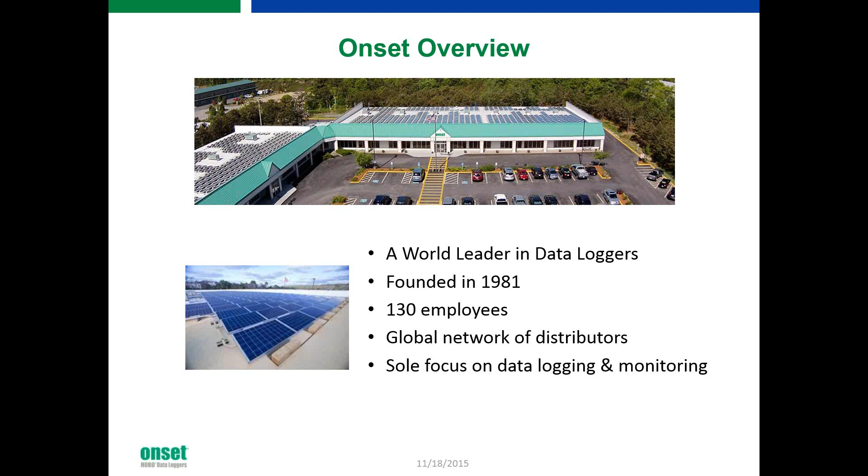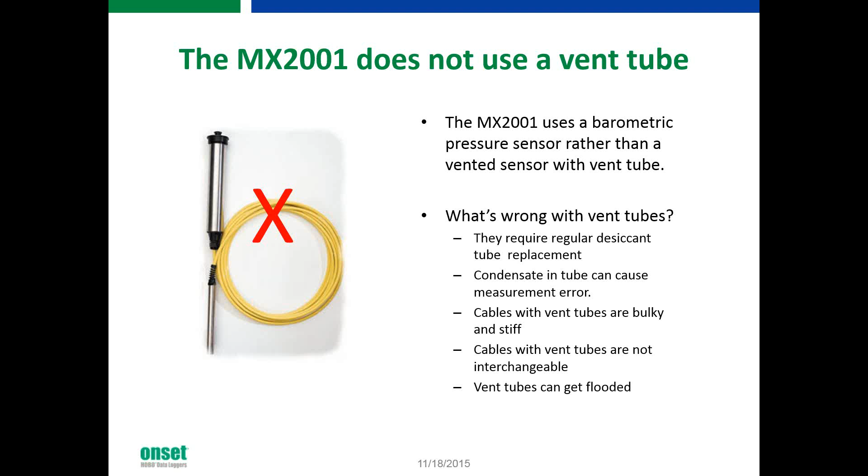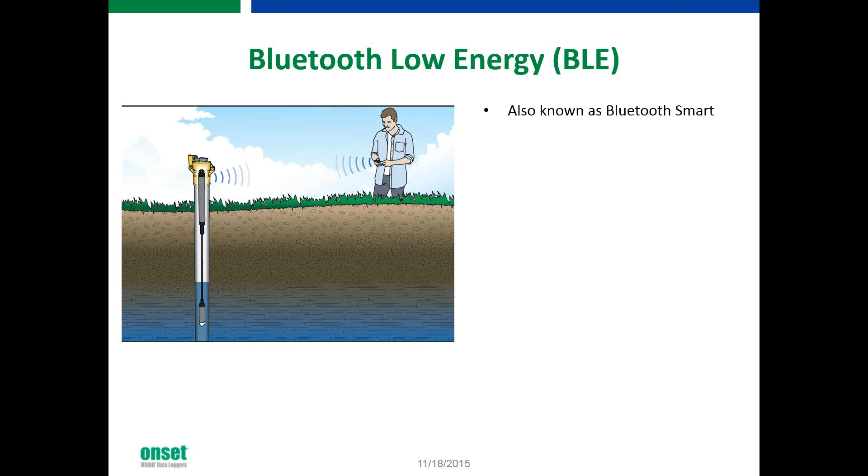Also I want to point out that this logger uses Bluetooth Low Energy, also known as BLE, which is also known as Bluetooth Smart. There are different terms used by different organizations. We tend to use BLE. The nice thing about BLE is that the mobile device can initiate communications without needing to push a button on the logger, which would be necessary if we had used classic Bluetooth 2.0. So BLE really provides the easiest offload.

It also provides low current use, which enables the 1-year battery life that we get from the AA batteries in the top unit. Today's mobile devices come with Bluetooth 4.0, which actually includes both BLE that we use as well as support for classic Bluetooth.

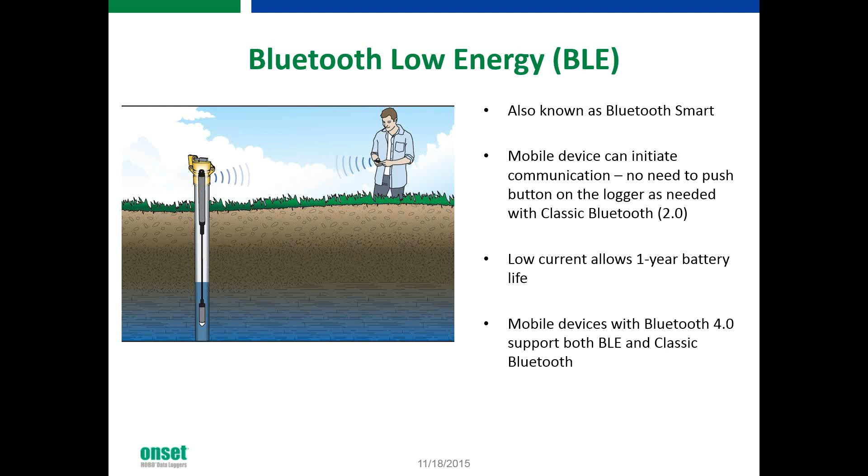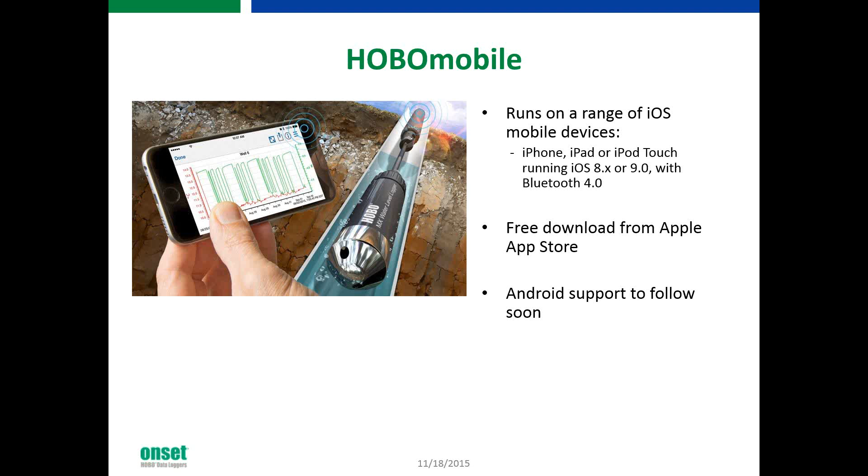Now switching gears from the hardware to the software side, HOBOmobile is the software interface. It runs on a range of iOS mobile devices, including iPhones, iPads, and iPod touches, running iOS 8.x and 9.0 that have Bluetooth 4.0. This is a free download from the Apple App Store. You can go there and take a peek at that now. At this point, we do not have Android support yet. That's in progress, and we hope to have that soon.

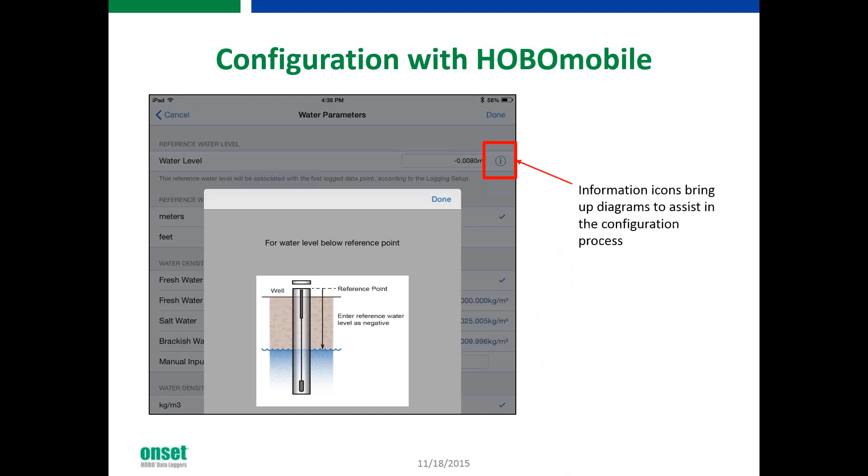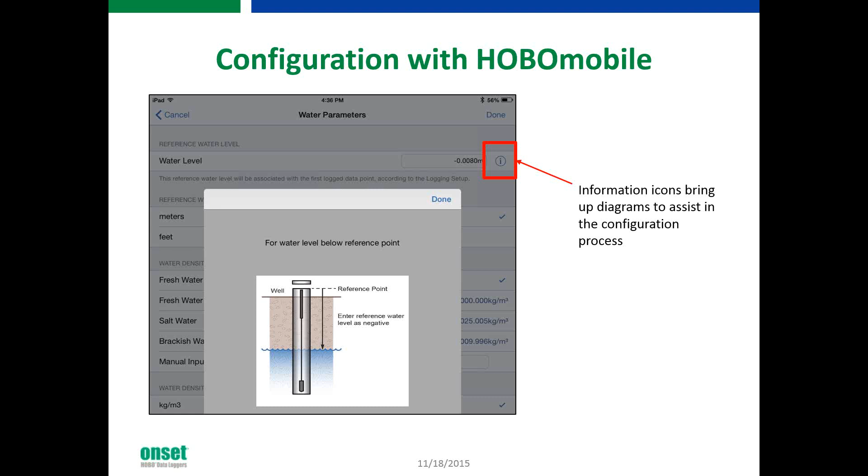So also in configuration, we've got these little handy diagrams to help you decide what polarity to use when entering the reference water level. So for example, if you're using the top of the well as your reference point and you're measuring down to the water table, you'd enter the reference water level as a negative value. That keeps the polarity correct. And those little screens are accessed with that i icon up there.

There's several logging modes in this logger. The first one is kind of the traditional, normal, fixed-rate logging, where it logs every 5 minutes, for example. Then we have the option of multi-rate logging, where you can define in advance up to 8 logging intervals. Each logging interval can have its own logging rate and number of samples. So an example of where you might want to use this is in a pump down test, where you want to sample very fast at first, but then you want to slow down the logging rate as the aquifer reaches equilibrium.

There's also a burst logging mode. Some people call this an event logging mode. And basically what this is, is that a logger will log at a faster rate when the water level goes below or above some reference level that you can enter in. So, for example, when the pumps turn on and it draws the water level below a certain level, you can have it log at a faster rate for that time.

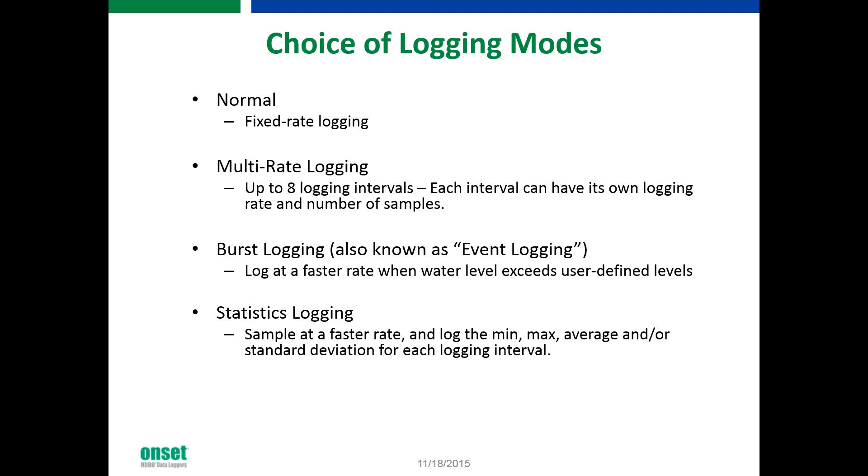Another mode in this logger is statistics logging. This is where it takes samples at a faster rate and then can log the minimum, maximum, average, and/or standard deviation for each logging interval. So for example, you might sample at a 30-second rate and log every 5 minutes, so you get the average of 10 readings over that 5-minute interval. That can be useful if you're trying to look for peaks and/or averaging out noise, for example. You know, averaging out waves. The statistics can help with that.

So as I mentioned earlier, you can view the current conditions during the deployment. So here's the 4 readings you can see in real time: the differential pressure, the absolute pressure, that's the absolute pressure of the sensor that's in the water, the temperature of the water, and then the water level can be displayed directly there as well. So you can view those during the deployment at any time when you're out in the field.

And then you can also view the product ID, device details like battery level, make sure your battery level is still good, make sure you've got enough memory left, and confirm that it's logging.

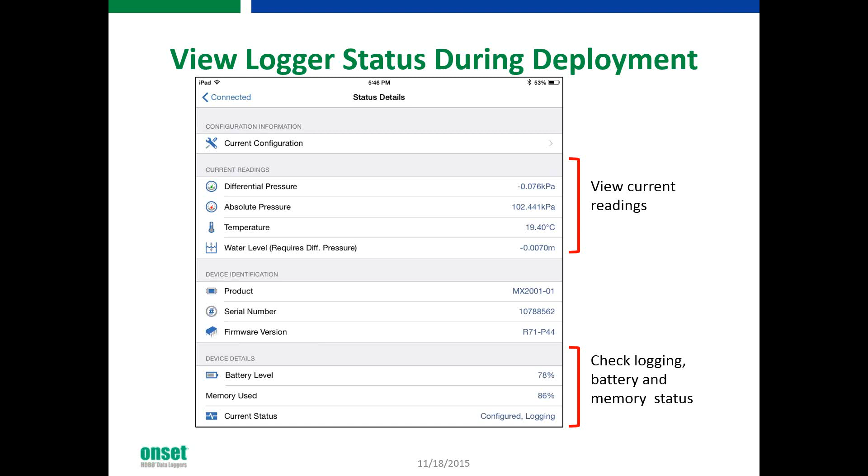And turns out these mobile platforms are pretty powerful, so we can easily show graphs, and that's a nice way to confirm that everything's operating as you'd expect during the deployment. So you can offload a graph like this, and then you can use the pinch and outward spread gestures to zoom in and zoom out to get a better view of what's happening.

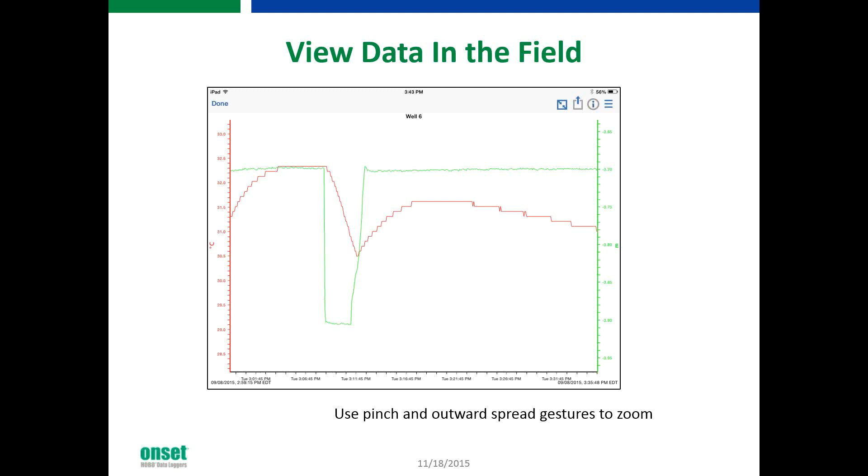And then you can easily share those offloaded data files in a variety of formats: Excel, CSV, text formats, our HOBO format for compatibility with our HOBOware software. And then you can share these via email, AirDrop, Google Drive, etc. And that depends upon what sharing apps you have installed on your device.

We also have a time-saving option, which allows you to carry over the logging configuration settings for a group of loggers that are being deployed together so that they all start at the same time and all have the same logging rate. It's a good way to ensure consistency across all your loggers.

However, this does not carry over the reference water level or water density or alarm settings for the loggers. It keeps whatever was in the logger already. We're assuming that the loggers are staying in the same well, so you want to keep the same reference level in the logger.

So a few other specifications that might be of interest. The first one I want to talk about is accuracy. When you're thinking of accuracy, you need to consider both the water level sensor accuracy and the barometric pressure sensor accuracy, because they can both contribute to measurement error.

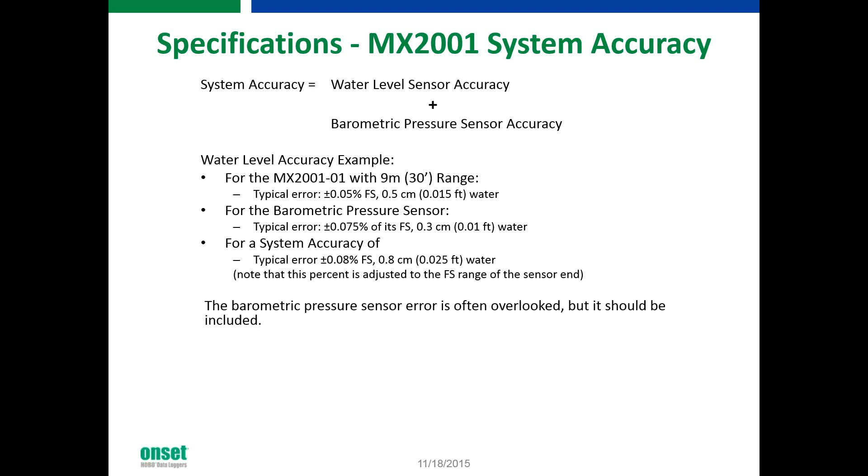And if you convert that over to percentage, that's 0.08% of full scale. So that just gives you a sense for how to determine the accuracy you're going to get. And being quite honest, barometric pressure sensor error is often overlooked when people are looking at water level loggers, but it really should be included as part of the overall system accuracy.

And the MX2001 sensors are calibrated in production here to provide accurate temperature compensation over the 0 to 40 C operating range, or actually I should say calibrated range of these loggers.

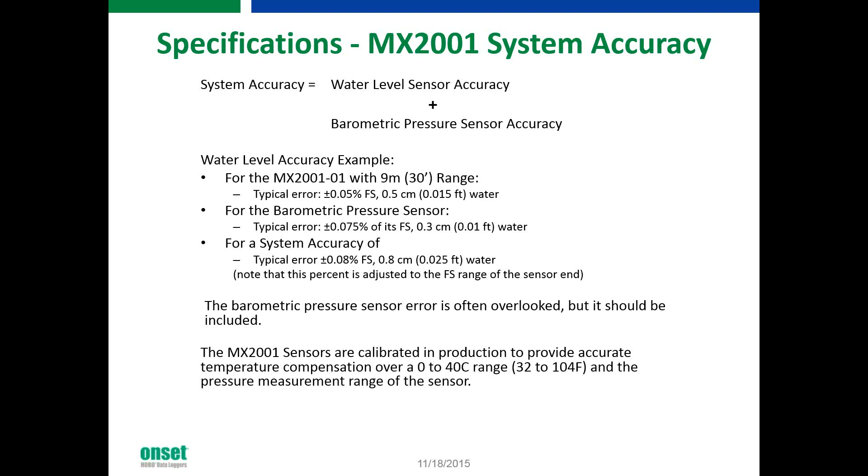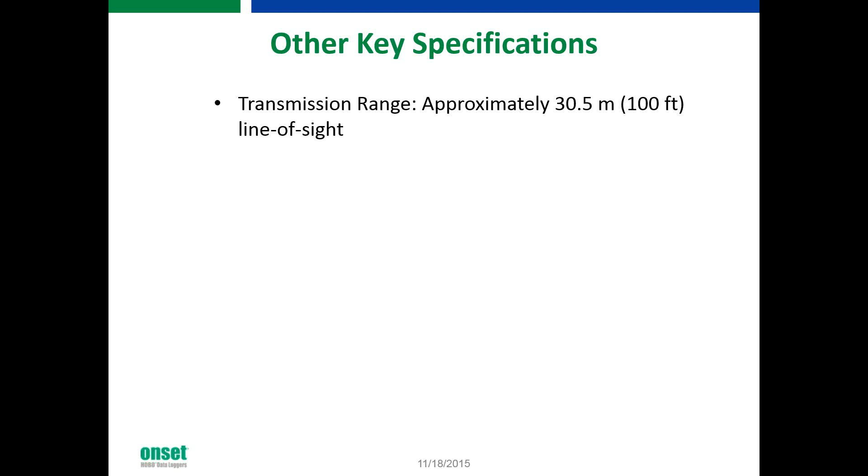Some other specs you may be interested in. The wireless range is 100 feet, or just over 30 meters line of sight. So if you're in the area, you're going to be able to read out the logger. Memory is 256 kbyte. That's good for 30,000 sets of measurements of all those different parameters that the logger records: the temperature, differential pressure, absolute pressure, water level, etc.

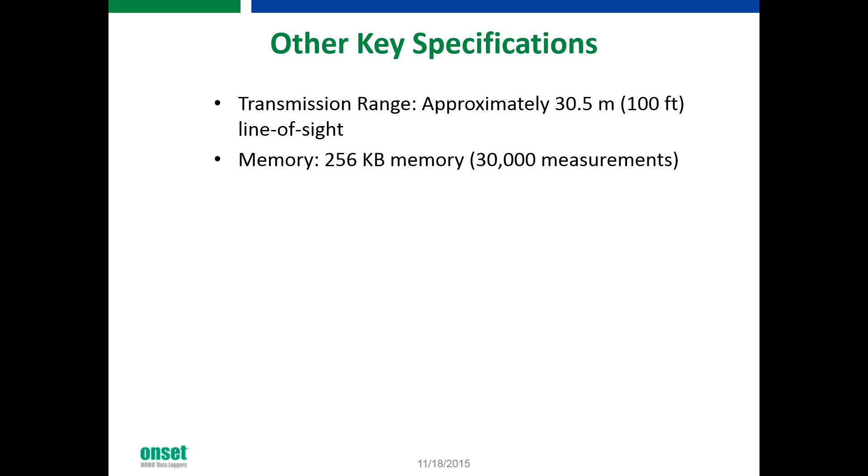The battery life, I think I mentioned this earlier, is 1 year with a 1 minute logging interval. And the batteries are user replaceable with standard alkaline AA batteries. One question that's come up, especially for those of you in colder climates: the alkaline batteries can be replaced with lithium AA batteries, and this extends the operating range down to -20 degrees Celsius. Now that's for the top end unit.

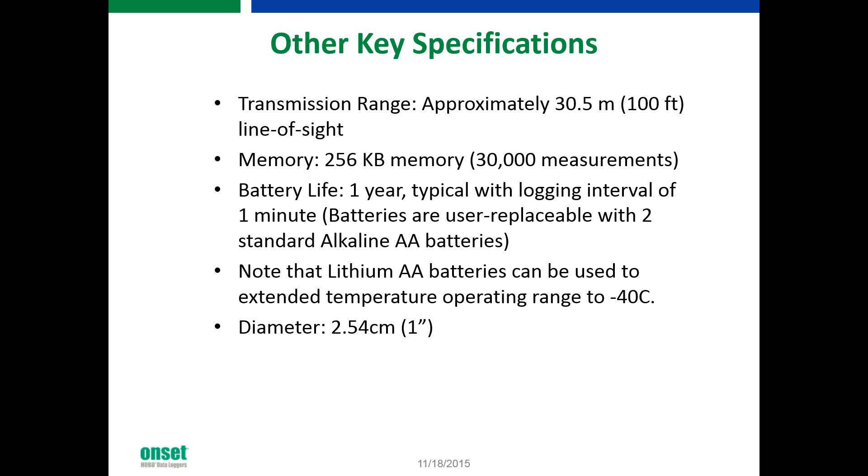Obviously, to measure water level, the sensor needs to be in water. It doesn't measure the ice level very well. That kind of throws off the pressure sensor. Diameter of the logger, both the top end and the sensor end unit, is 1 inch or 2.54 centimeters. And because this does use wireless communications, it is subject to wireless compliance standards where it's used.

So as of this point, we've done the certification testing for the US, Canada, Australia, New Zealand, and all of the CE countries. We do plan on doing some additional testing, so stay tuned if you're in other countries.

A little bit about pricing. As I mentioned before, it comes in 2 different versions, one with the stainless steel end cap and the other with the titanium end caps. The price with the stainless end caps is $595. With titanium, it's $645. And this includes both the top end unit and the sensor end. We sell them together as sets, and then all you need to buy is a cable and then the HOBOmobile download from the App Store, which is free.

For the cables, the pricing is based on a $70 US dollar base price, and then it's $4 per meter for the length. We have 5 lengths in stock at this point, and we'll keep these lengths in stock, so you can see the prices on those. But there's a wide range of custom lengths available as well. Current lead time on those is 2 to 4 weeks. We might tighten that up a little bit as we ramp up production.

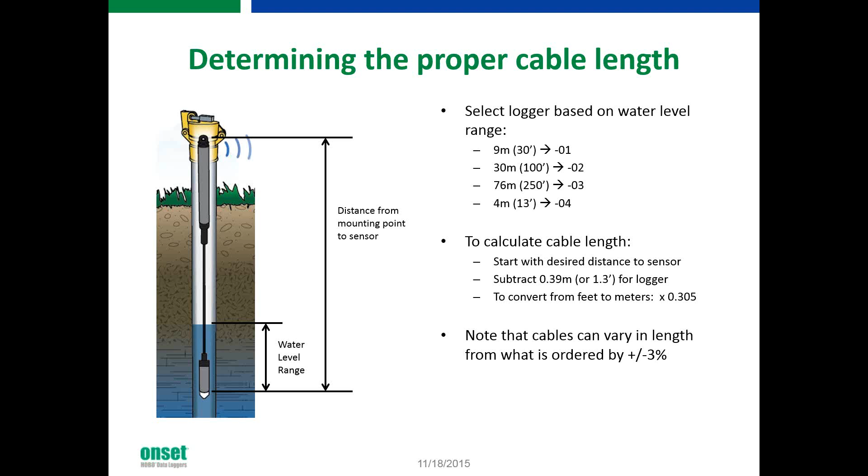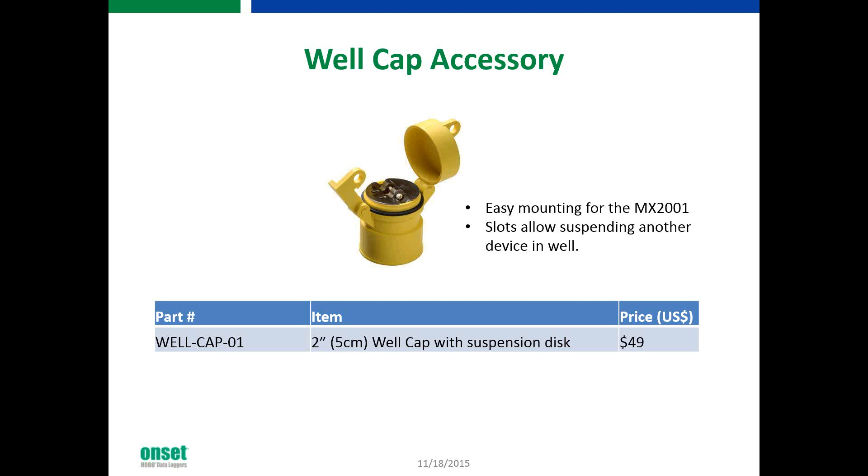So if you need access to the well for other things, you can pull up the logger temporarily, do that, and then slide it back down into place. It does have slots for mounting suspension cables for other devices as well, and the price on that is $49. That includes everything you see there in the picture.

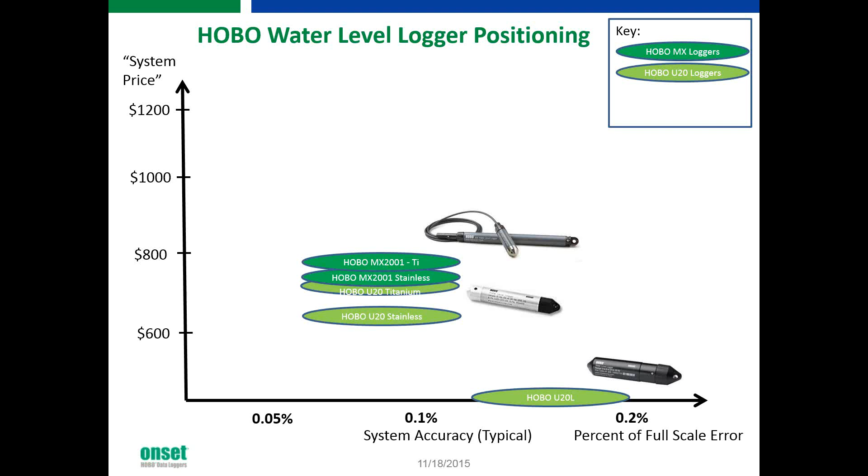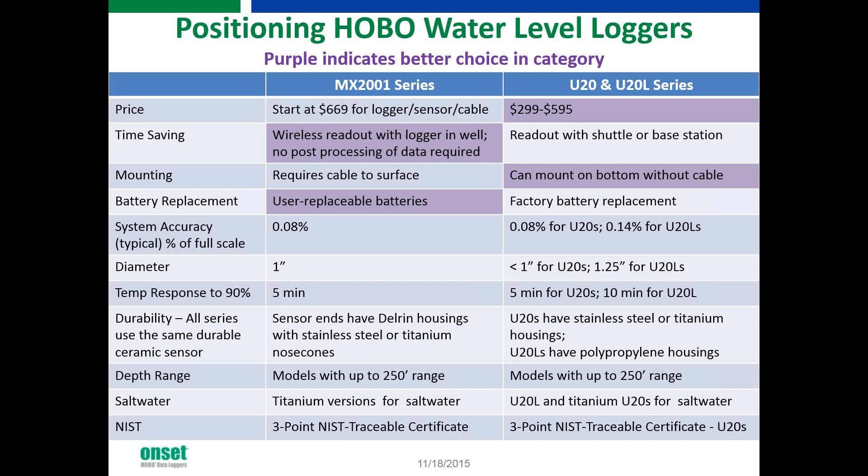So as you can see, the rest of the choices are pretty much not really decision factors between them. You can get the same accuracy between these families. You can get the same diameter, temperature response, both durable, the same depth ranges, and both have saltwater versions. And the MX2001s also have the 3-point NIST traceable certificate included with them, like the U20s do. So really the key differences to be looking at are the ones highlighted in purple.

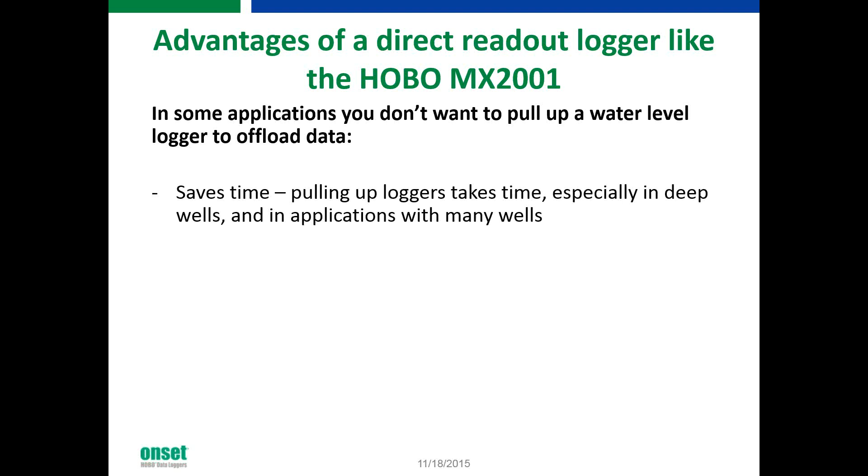So I want to talk just briefly about the advantages of a direct readout logger in general. So using the MX2001 as an example, and by a direct readout logger, I mean one that has a cable from the top to the sensor or logger that's down in the bottom of the well. And it's really for cases where you don't want to pull up the water level logger or sensor to offload the data. And some of the reasons for this is it saves time. Pulling up the loggers can take time, especially if they're in a deep well. And if there's many wells, it also takes a lot of time.

There are also applications where there can be other instruments or pumps in the well, so pulling up a logger can be problematic because that might get tangled up in the other instruments. Another issue is if you've got a deep well, those long cables down to the sensor or logger at the bottom can create an octopus mess when you pull all that up. So I guess you can deal with that with a reel, but again, leaving it down there saves having to deal with that. And it also avoids exposing the user to potential contaminants in the well. And on the other side, it avoids potentially knocking dirt or something into the well if you're not having to futz with a cable. So those are just some general advantages of direct readout type loggers.

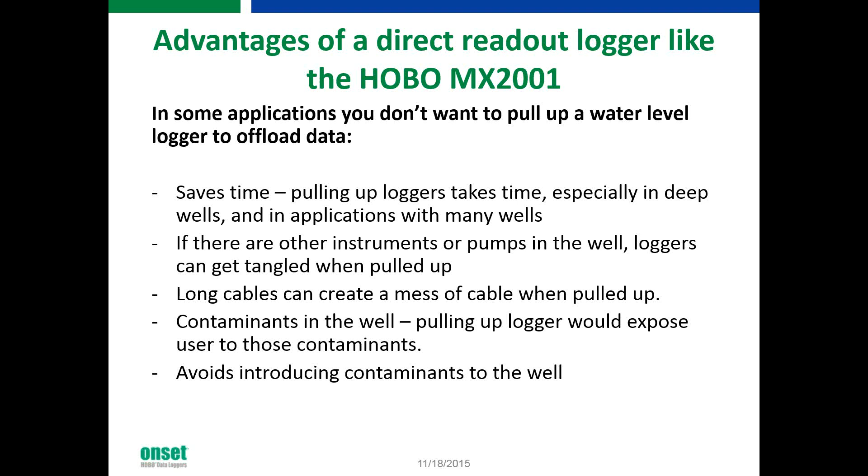I should also mention another option for monitoring water levels is internet-enabled water level loggers. And for that, we have what we call the HOBO RX3000, which has cellular communications, Wi-Fi communications options, and it has 4 to 20 milliamp inputs. And there's a wide range of sensors out there that have 4 to 20 milliamp outputs that can be connected into this. So we get a lot of users that are using this combination so that they can see water level from wherever they are, as well as getting alarm notifications. And it also opens up a lot of flexible data sharing options. We do have an application note on using the RX3000s with water level sensors on our website.

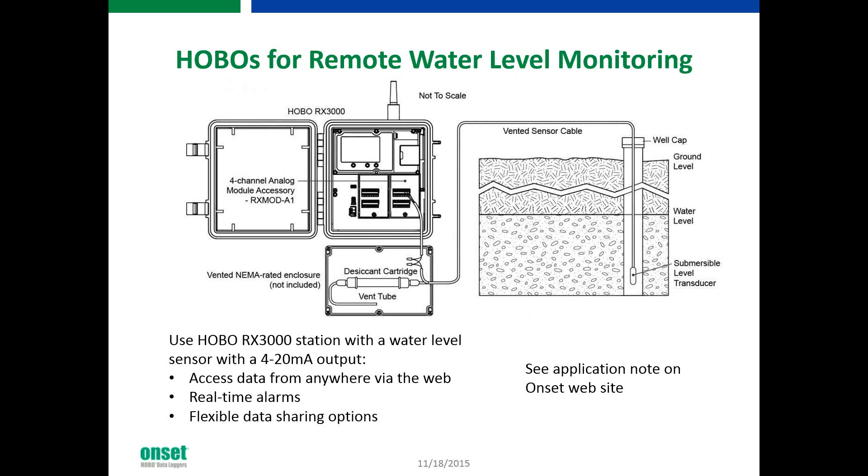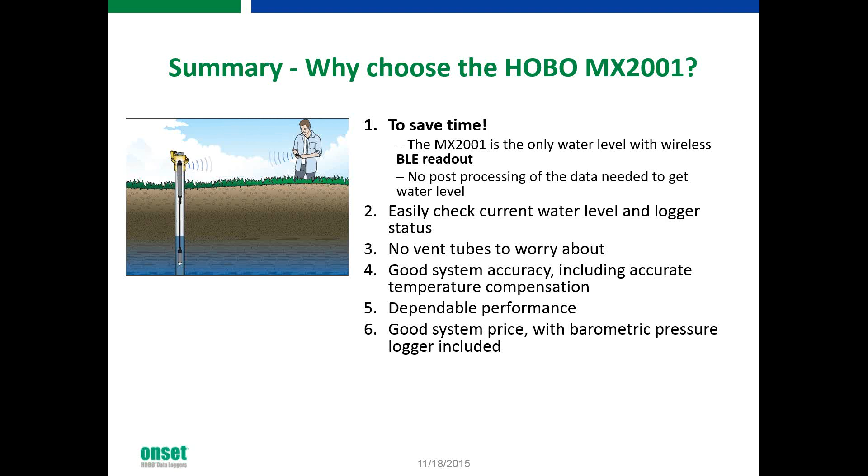So just kind of a quick summary. Why would you choose to use the HOBO MX2001? The big reason is clearly to save time with a wireless readout and not having to do the post-processing of the data. You can also easily check the current water level and logger status during deployment. You don't have to worry about vent tubes. You get good accuracy, dependable performance, all for a pretty good price, especially when you consider that it includes the barometric pressure sensor, and it has the user replaceable batteries.

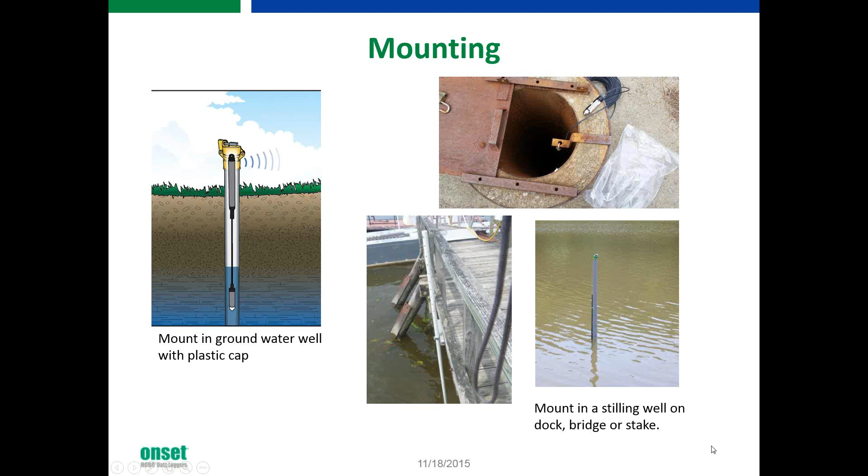Another case to keep in mind is if you're along a stream, a lot of times you can't have a stilling well out in the middle of the stream, but you have the option of having a pipe that runs down along the side. Because it's measuring pressure with the sensor, it can be at an angle. The well does not have to be vertical because it's just measuring pressure. And this is a good way of protecting the cable and the sensor in this kind of deployment.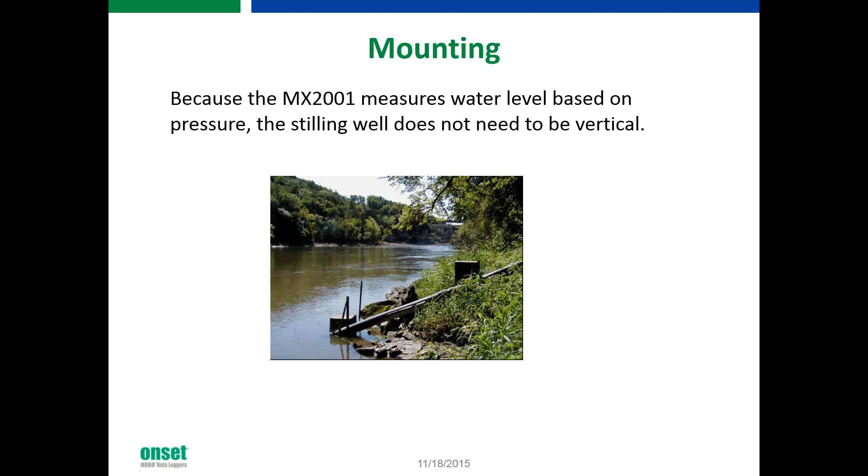Another thing I just wanted to talk about is, in some cases you may not have exactly the cable length you want. You can always order another cable from us and use that for your next deployment because the cables are interchangeable. But even then, you may still find a case where you need to either shorten or lengthen the cable a little bit. Because of the nature of these cables, they need to be waterproof. You can't cut and splice them. You want to preserve the integrity of the cable.

Then on the other side, if you need to lengthen the cable, you really can't lengthen the cable per se, but you can suspend the logger lower in the well, and you're just hanging that from another cable. But that may mean that the wireless communications won't work as well, because if the wireless is below ground level or in the metal part of a well, you may have to be directly over the well to offload the data. But that's an option that you can consider.

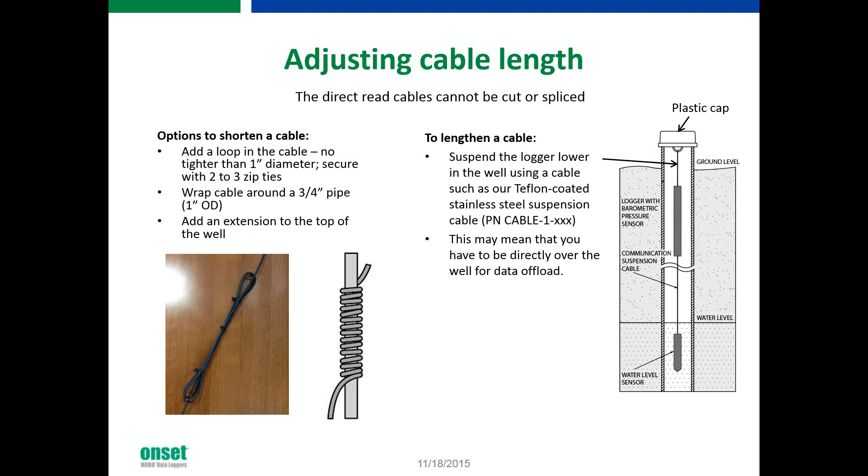So, yeah, we're pretty much right on time here. I've got just under 20 minutes for questions. I haven't had my questions window open, but let me open that up and see what's on your mind. Oh, great. Many questions here. So give me a second to scroll through them. I'm just going to start in the order that I see them here.

First question is, are there batteries in the lower sensor unit as well? And the answer on that is no. The batteries are entirely in the upper unit, and that's part of what the cable does, it brings the battery power from the top end unit down to the sensor end unit. We went with that approach because it makes it easier to replace the batteries if you just have the one place where you have to replace them.

Let's see. Next question. This is a common one. Can the MX2001 be configured to communicate automatically with an Onset weather station? The answer at this time is no. We don't have a Bluetooth receiver for any of our weather stations. If you do need the web-enabled capability, that would be the RX3000 configuration I was talking about with a third-party water level sensor. But certainly, we're going to consider ways of integrating the MX2001 with our weather stations for the future, because we definitely see the need for that.